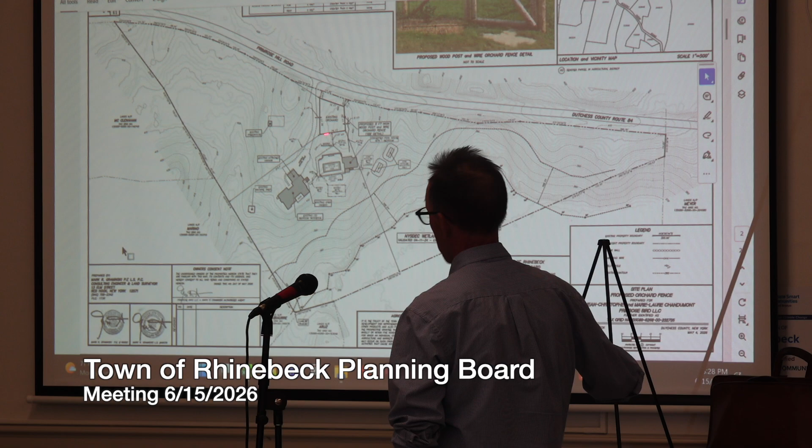Here's the residence, pool house, pool, and to the north of that, in this area I outlined right here, is an orchard. Some of us really enjoy that, but so do the deer and the bear. So the proposal is to provide an 8-foot high fence around the entire garden to protect the orchard.

Here's a snapshot of what's being proposed - the wood posts, black wire - and it requires consideration by this board for site plan special permit due to this location, due to the proximity of that orchard, and that's related to the front setback to Primrose Hill Road. It also requires consideration by the ZBA due to the height of the fence, which is proposed to be 8 feet high.

That application has already been presented and discussed with the ZBA, and we had a public hearing for consideration of the area variance for the height of the fence. But for this board's consideration, the requirement is for site plan special permit for the construction of the fence. We also provided other drawings of the fence, but here's a snapshot of what's being proposed.

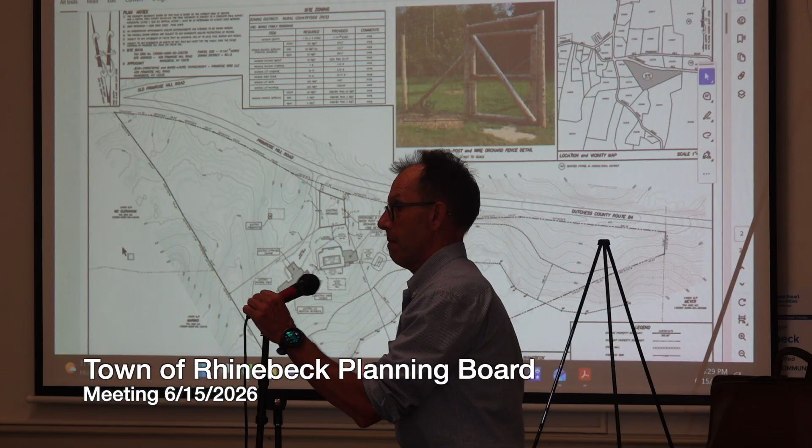Not much from me, most of the things have been addressed. If you remember, we did look at this from the ZBA referral, and asked them to hold off until you were able to take a look at it in more detail.

Other than the view from the road, it's not a scenic road. I don't see any issues with it. We have looked at a couple other fences in the RC5 that are very similar to this. This might be a little closer to the road than a couple of the others, but it's pretty typical.

Any board members? Questions, comments? People there. Oh, I was gonna ask the same question.

Are you confident about the bear? That's what they said, I don't know. Deer maybe, I'm not so sure that they'll live here. At least it's not nothing else. Remains to be seen, depends how determined the bear is.

Anything else? All right, can we have a draft procedural resolution? Procedural resolution.

The draft procedural resolution for the board's consideration for the application of Jean-Christophe and Marie-Laure Chandemont for site plan special use permit out of chapter 125 for the addition of construction of a fence, 426 Primrose Hill Road, in the RC5 Zoning District. Accepting the application and supporting documents as adequate for further review.

Classifying the action as type 2 under SEQR, for which coordinated environmental quality review is not required. We will schedule the public hearing for July 20th, no earlier than 6:05 p.m. We'll send it to the CAB as a referral, and we need 2 planning board members to accept it.

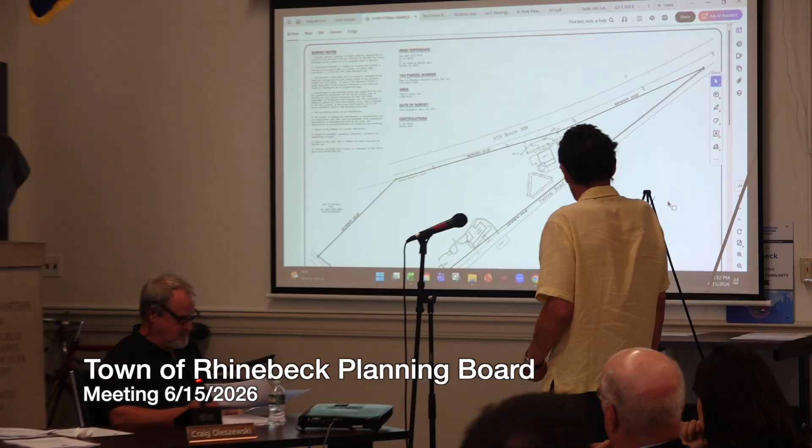Introduce yourself and tell us what you'd like to do. Yes, my name is Michael Broad, and I'd like to complete the fencing of a portion of the property which I began some time ago.

The second one, this one. Okay, so there's this fence here, and a fence along the back.

And apparently, as I said, I began the fence not knowing that I needed a permit to build a fence. I worked with Brian Tam. He told me what I had to do to apply for the necessary variances to do what I was doing and hoped to complete. That's what I tried to explain in my application here.

I don't know what else I can tell you, except that the fence was put in backwards. It's one thing I learned, so I agreed with Brian that I would skin this on the front so it looked like that. Mostly my intent was to block some of the pollution from 308.

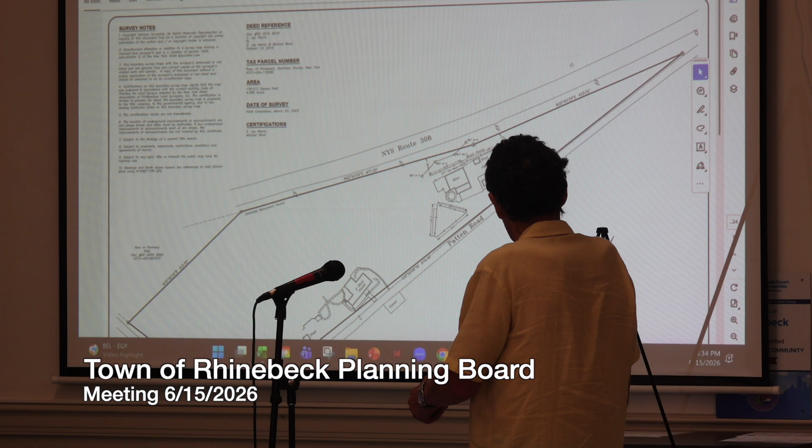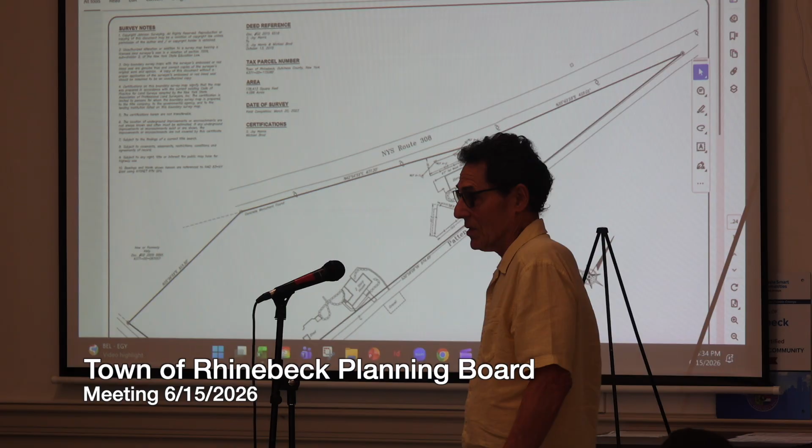So does the variance include the fact that you will not be able to see through this fence? Yes. Because there will not be the ability to see through it, correct? When it's completed, all of it.

No, just the one along 308 and the one that traverses the property that takes all the incoming headlights. The one that runs along Patten Road is 4 feet high and has 2-inch spacing between the fence boards, and was built right side out.

So again, if you remember last month, this one is also a referral from the ZBA, which said to hold off until we could take another look. Michael has done a wetlands delineation, and I believe the DEC did take jurisdiction over the wetlands. Yes, I notified them and asked them to come out. I was told maybe they'll come, maybe they won't, we have 100 days to do it in. So the board will need to hear from them.

I put the pictures up there so you can take a look. He's going to put the posts on the inside, which is the way fences are supposed to be built. I have no other comments. It's really more discussion about the post fence, the installed ones.

Where's the wetland? This is the crucial line. Oh I see, so it just cuts through the buffer. Most of the property is actually in the buffer. The wetlands begin on this side at 308, and there's a culvert that brings it out, coming through just about here, and then the rest of our property has wetlands on it through to across Patten Road and the Nine Points property. So my fence sort of ends where the culvert comes under 308. I left room underneath the fence so there'd be no impediment to water flow coming down from the other side.

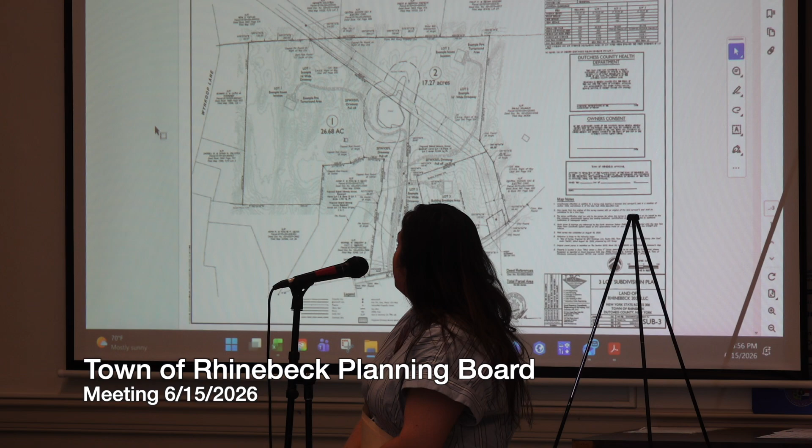Since the last meeting, I believe you guys conducted a site walk, which was outstanding, and I got confirmation today about that. If I remember, the driveway wasn't on this plan, so we got an updated plan and sent it to Jim, Lucky, and Gretchen today. He just wanted the dimensions of the turnoffs, which we added and sent to him today, and he signed off on it, and I forwarded that to the clerk. So I believe all that's outstanding is just the DOT approval, which can be a condition.

I think that's all we're waiting on. I don't have any issues. Okay, there was a letter from the neighbor. There was a letter from the neighbor, and Sean and I did the site visit, and we're happy to report on that.

We received a letter from the neighbor. The neighbors who were here at the last meeting, I don't believe they're here this evening. I don't see them. We did offer them the opportunity to submit their comments in writing and asked them to get them to us as quickly as possible. They were only received this afternoon, but I think Sean and I can talk about it. So we can say, right, Sean, let's start.

As Melody mentioned, they did a site visit. There was concern from a letter about dirt removal, clearing of a pond, changing of the landscape, and removing of trees. I will report that there is absolutely zero evidence of that on the site visit.

We spent probably 25 minutes touring this entire site by vehicle. We went to each site where the houses were proposed. In doing that, you had to drive by the pond and see the rest of the property. So I'll just say that on record. That's what I witnessed. Other than that, it's a beautiful site.

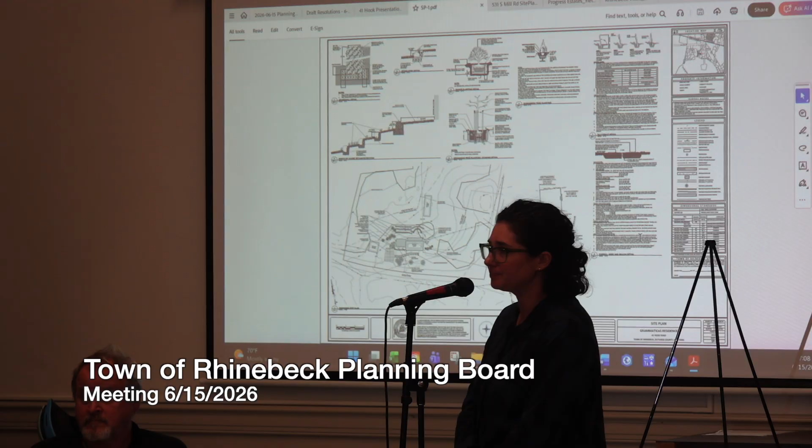Hi, my name is Elsa Tallis. I'm here representing the Art of Building and Elizabeth Gomakis. Would you like me to walk through the entire presentation again, or sort of a quick notes version? Entire presentation? No.

So the site is, can you go down, so the site is at the corner of Hook Road and Lemon Lane. It's an existing historic house, which is right here. The first section of it was built in the late 1700s, and an addition was placed on it in the early 1800s. Our proposal is to add 2 small additions: a single-story gable roof addition on the western side of the house, and 2 bay window additions off the northern side of the house united beneath a single hip roof. We're also proposing basically a single stacked stone retaining wall here to help create a more level pad at the northern side of the house, which currently drops off very dramatically.

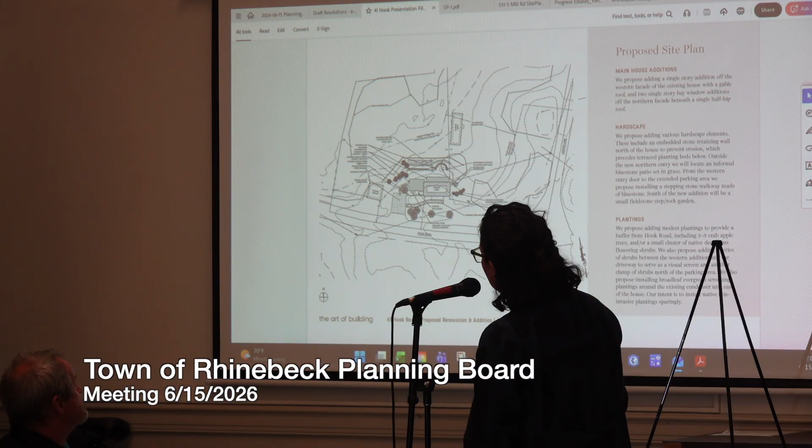And then some terraced gardens which replicate existing construction that our client has installed previously. On the site, there's also a 20th century garage right here, and a historic one right here. And then this parking area, which is existing, as well as this little path right there, which is also existing, and we are proposing to work there. The site is really dominated by wetlands. Can you go down a couple more pages? Would you like a couple more pages?

Thank you very much. This is what I was thinking.

So this on the survey is the wetland boundary, and as you can see, the existing house and other buildings on the site are within that 100-foot buffer, as is the work we're proposing. However, we're proposing work in an area already surrounded by construction, adjacent to this parking area and next to this existing garage. We're hoping that by building in that zone, we won't have to reach further impact on the site.

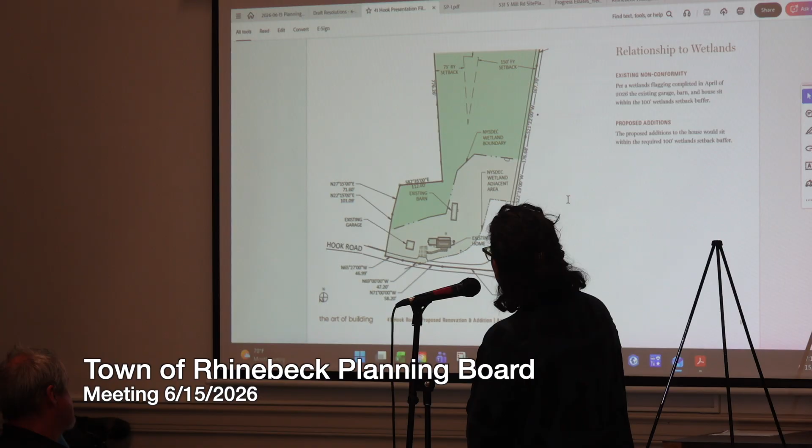Can I click down a couple more? I can talk through that architecture. So up here is the existing first floor plan. We're proposing an interior renovation, basically to expand the kitchen and change up the dining area a little bit.

We're proposing refinishing some of these two floors, which are in bad shape. This is the larger of the two additions we're proposing, which is basically just a small boot room, stacked washer and dryer with a folding closet next to it, two little closets, a hall, and then a full bath right here. We're also proposing an addition here, like a little sort of bump-out in the living room, and an addition here to expand the footprint of the existing kitchen a little bit.

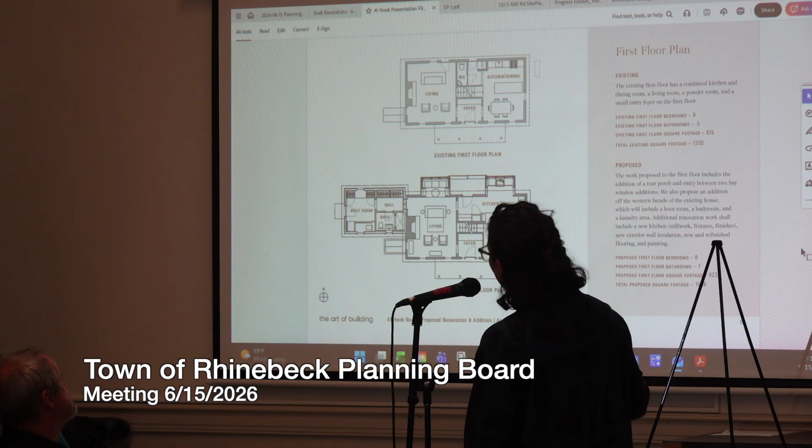The site is incredibly beautiful, and the views to the north are especially special. So one of the things we're hoping to do with this proposed architecture is really open up the interior of the first floor to more light, air, and views to the north side of the site.

We had previously talked about this — Betty had raised a concern that this room might be used as an additional bedroom. We created these diagrams to show that there's really not a way to fit either a queen size or a twin size bed into this space.

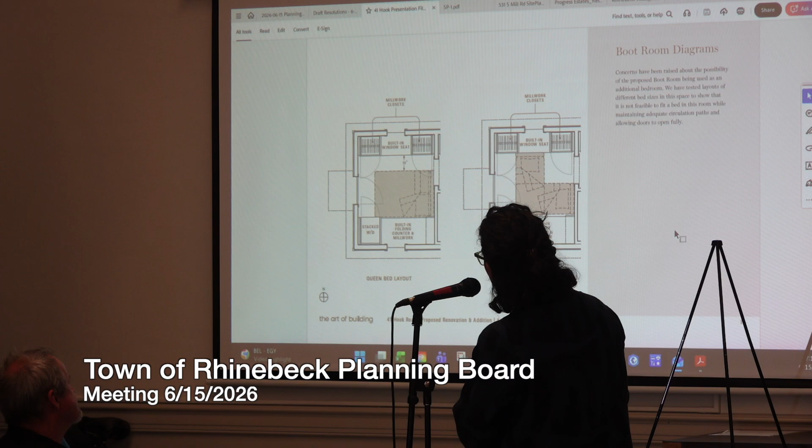We're replicating the existing cornice detail to the extent that we can. We're trying to source historic windows that match the size and light layout of the existing historic ones, and we're going to try to recreate the existing siding to the extent that we're able to.

On the northern side, these are the two bay window additions we've proposed, and we're really trying to work with the language of basically a porch. We're trying to open up light and air into the house, to get more light into that first floor, which currently is pretty dark.

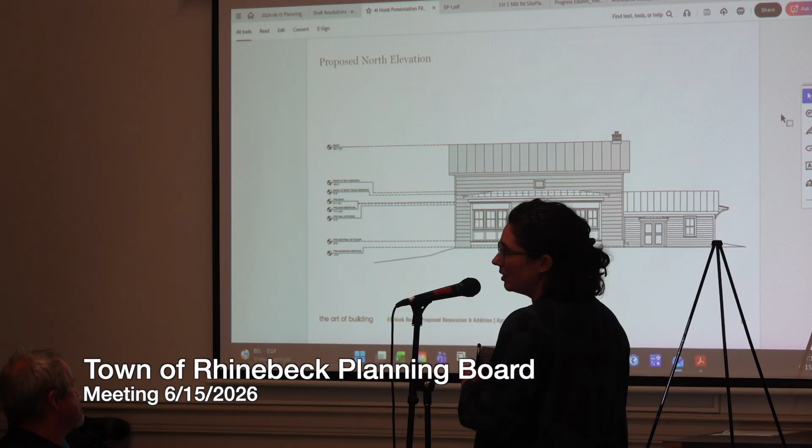One of the basic elements you'd maybe see on a historic house is a porch. They didn't typically have large ganged openings, so we're trying to work again with that language a little bit and use more historically accurate window units in the language of a porch.

We're attempting to source historic window units, and we've been working with White Clay Kill Preservation to actually restore the existing historic units on the house. We're hoping we can get reclaimed historic units to restore and install, but that's still up in the air — we're not sure if we'll be able to source them. If not, we'll propose Marvin Ultimate double-hung windows with a thin profile.

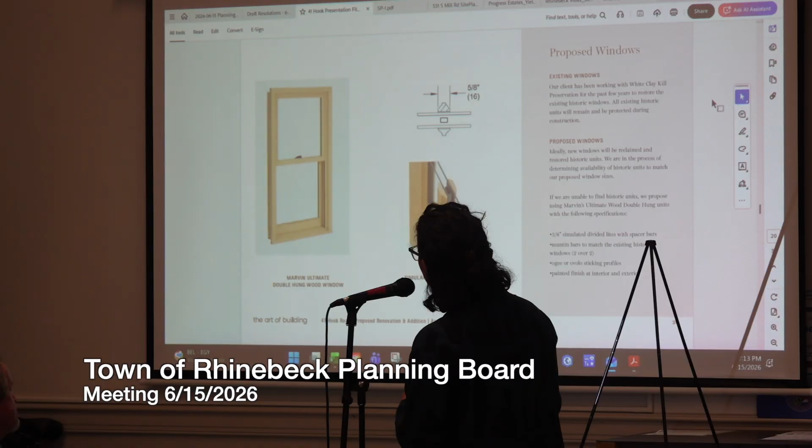The proposed exterior doors: this is the main door on the south facade, and we've already found the source of the historic door that we're going to restore and install, hopefully. For the western entry and the northern entry door, we're hoping to find Dutch doors, which we think would have been historically accurate for this time period, although we don't have any documentation of what would have been installed in the house originally — but that's what we're hoping for.

For the landscape, here's that embedded stone retaining wall I mentioned. This is the approximate location of the existing septic area.

I think this section might be an outdated presentation. We did add a note saying we were going to investigate it on site and mark it. I think I submitted that site plan, but there should be that note. So we'll check for it, mark it, and make sure we're moving carefully around it during construction.

The intent here is to create a level pad off the northern side of the house with these terraced gardens. We'll largely leave it up to Liz to install plantings there, but the hope is that it'll function as a rain garden to help with some of the runoff from the roof that currently goes straight down into the wetlands.

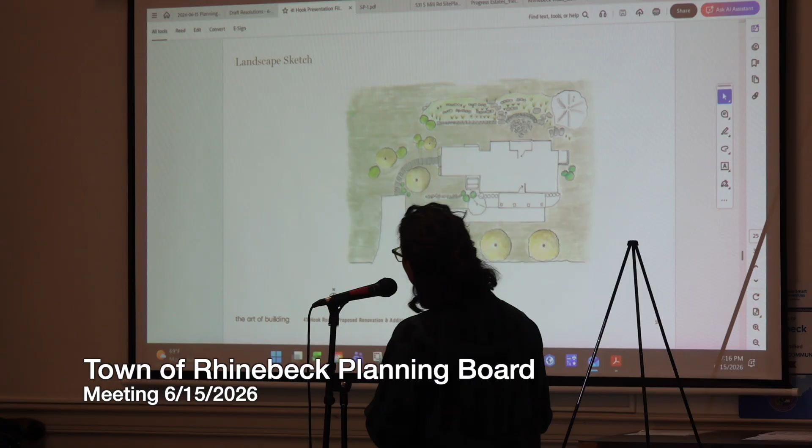These are some sketches. This is the proposed southern view from the road, showing the landscape screening to the house. And this is the proposed western view from the parking area, looking at the new western addition to the house.

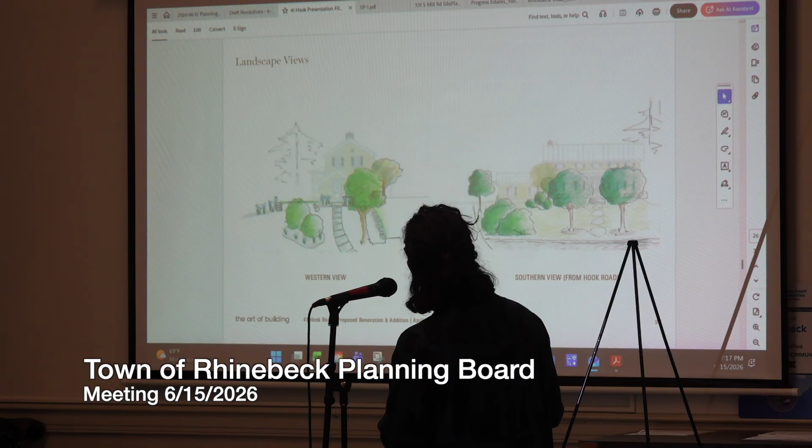In terms of look and feel from the landscape, we're really trying to go for planting material and hardscape material that feels as though it could have been on the site for 200 years, and that feels historically appropriate for that era of the house.

I think that's probably right. Yeah, Jim.

The only question I have is the status of the first recommendation. We haven't heard anything yet. Unfortunately, we have to wait to hear from the DEC before the board can move forward, in case they decide to make any changes.

All right, is there a site visit? Yes, Rick and I went with Sharon. You want to go first, or?

It was really a nice site visit. The garden on the west side was really nice, but it's going to be moved and redone a bit further north so there's more room. We can come out of the back of the house. It's currently about 5-6 feet, which isn't comfortable when people are moving around there. So it needs to be wider.

So I think we'll construct the garden downhill a little bit. It's steep, but it's got retaining walls. The view is beautiful toward the marsh, including the driveway and the garage.

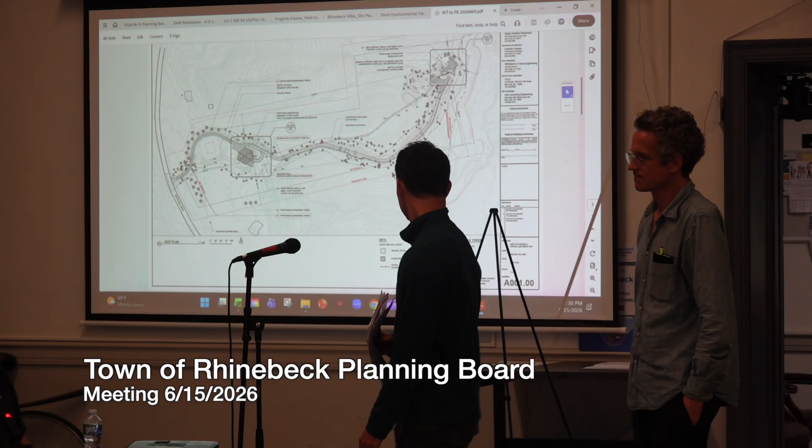Can you say your current health status? We have health department, I provided a letter, they're not going to give us approval until you guys do.

Well, I don't have anything else that came down to Christian's engineering questions and comments. I haven't seen a response. I do know you've responded to them saying that you addressed all those comments, but they haven't really been addressed, correct? I am not sure.

Do you know how long it's been? Do you know when you sent your response to Richard? It was a couple weeks ago at least. I'm not sure the exact date that I sent it, but it's been a couple weeks. So Christian was copied on June 1st. That went out to the court. There's the 15th.

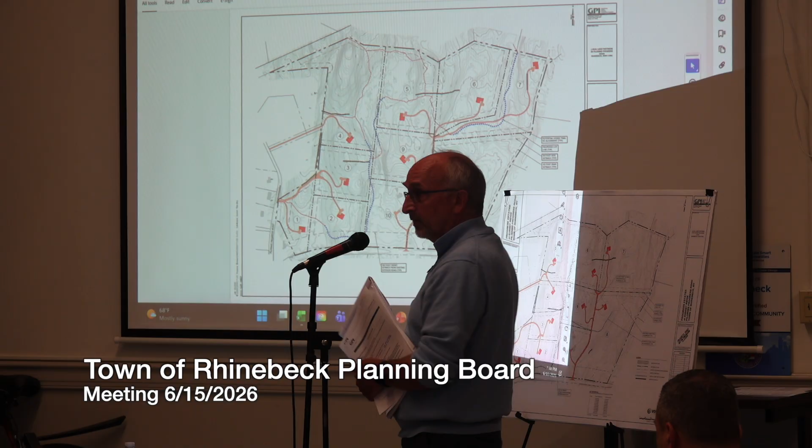So that's the update on the big picture of where we are. The main thing for us, as we mentioned at previous meetings, is that we're looking to get a clear picture of the path forward, so on our end we keep things moving as fast as possible and know what you guys are looking for from us.

From a planning perspective, I think that covers most everything. The only thing we'll want to do at some point is officially walk through the 4-step process and confirm you're good with it - the delineation of open space, the location of house sites, the alignment of streets and trails, and drawing of the lot lines. You've already signed off on the number of lots, which is essentially the sketch plan, concept plan.

So that would be the formal process - I'm sure you're good with that. Then it's just kind of details, the CPL review and anything else that might come up, plus the waiver request. Do you think the next meeting will be ready for the first step?

I think that's up to you, but from my perspective, what's in front of you is definitely more in keeping with what I was hoping to see. We've got linear development and linear areas of open space that work better with the wetlands, and it eliminates a lot of those driveways - 2, 6, and 7.

So it opens up a lot of open space, and keeps more use of that open space over here. Yeah, there's lots of evidence of change there. So it's really up to the board when you think you're ready.

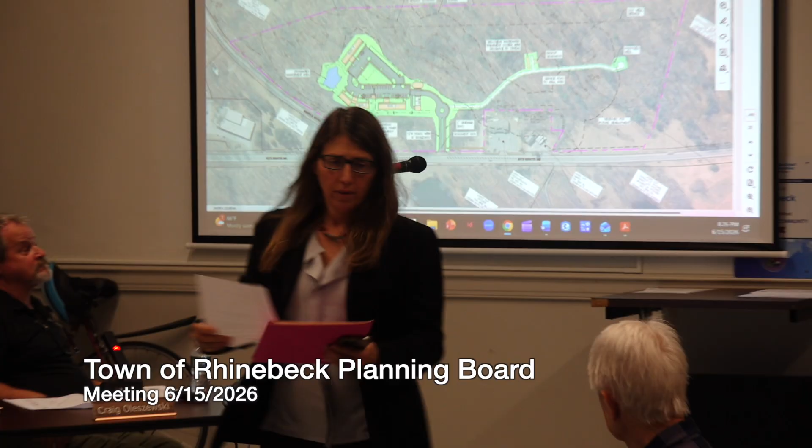Thank you. I'm not going to get into an argument, but when you look at the totality of correspondence that's been produced, and I've written extensively on this issue, there's nothing in the body of any letter indicating any type of dumping on the parcel at issue. It's plain and simple, as simple as that. You can look at the public record—it's all written out in letters and supporting documentation. I'll leave it at that. Thank you very much, I'm not going to engage in a back and forth.

Can I get that? I've never seen those letters. Where can I find them? They're all in the file, on Google Drive. Okay, I'll take a look. Thank you very much. Anyone else? Thank you.

I think we're ready to continue the meeting. What's the path of progress? Where are we and what happens next?

You need to get the draft SEQRA findings, take a look at it, and talk with myself and John about any questions or concerns. We'll read that out at the July 6th meeting, and then the board needs to do approval of the SEQRA findings before discussing potential approval of the project itself and the site plan. John, you said earlier you hope to have the draft done within two weeks, so we will be continuing this to July 6th.